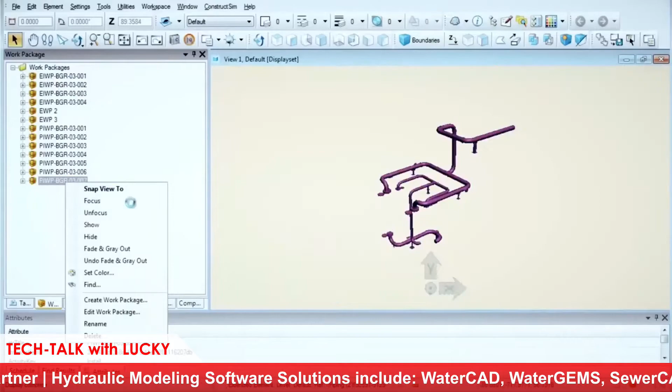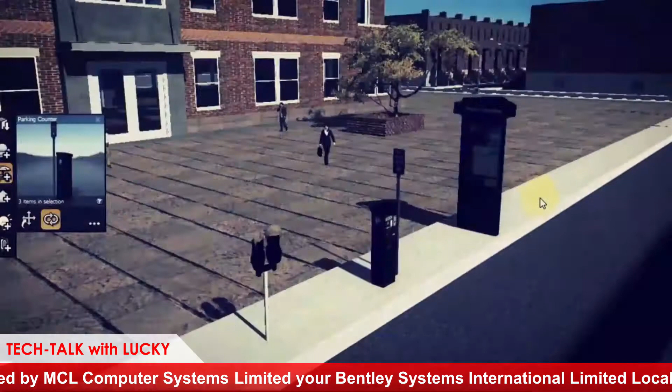Around the world, engineers and architects, constructors and owner-operators are using Bentley's software solutions to design, build and operate the infrastructure that sustains our economy and our environment. Together, we are advancing infrastructure. Bentley software has helped us deliver a successful Crossrail. Together with Bentley, Crossrail have created the Information Academy. It's about creating an environment for people to work together much more efficiently and effectively than they've ever done before. It is the front of house for our Emirates. So we wanted to do something spectacular, something iconic, something everybody will remember. We chose Bentley. There are not many competitors who could do a project on this scale. We wanted to use digital technology to do it in the best possible way. For this, we use Bentley software. We're very proud of the association with Bentley SACS. It's allowed us to be a leader in the industry. And more important is, the Bentley management has worked with us to help us feel that comfort to work with Bentley. And that is what is driving us. Bentley, advancing infrastructure.

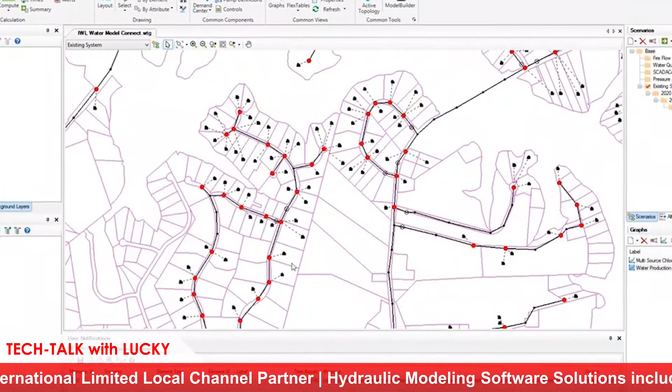There are things like the industrial Internet of Things, for example, where SCADA systems have been in place in water utilities for a long time. But now we're able to take that SCADA information, bring it into the connected data environment, use advanced analytics with that data, and use simulation models to not only understand the past and current performance of the system, but also forecast into the future how the system is going to perform, and again drive better decision-making for operations that can reduce costs, improve service levels, and reduce risk.

Bob, you wrote some of the code for the very first iteration of WaterCAD back in the 90s. What sort of changes have you seen in the industry and in the user experience since then? In 1995 I joined Haestad Methods, and later that year we started on WaterCAD 1.0. 22 years is almost an infinite amount of time in the software industry—things have changed so much it's really hard to identify just a few things to talk about.

We're incorporating cloud services into everything we do. For example, WaterGEMS and SewerGEMS CONNECT Edition seamlessly integrate with Bentley Cloud Services. And because now every CONNECT Edition application user is also a ProjectWise user, our WaterGEMS and SewerGEMS users can take advantage of cloud services like ProjectWise Share to share their reports and data with the project team, seamlessly through the cloud.

So what are some of the technological advances playing a role in Bentley's water and wastewater portfolio, enabling utilities to optimize efficiencies through intelligent infrastructure? Just think about it—in the last 5 to 10 years, the explosion of mobile devices, cloud computing, algorithms, machine learning, and all sorts of things that have happened recently. The technology we have now, better than ever before, enables this sort of digital transformation.

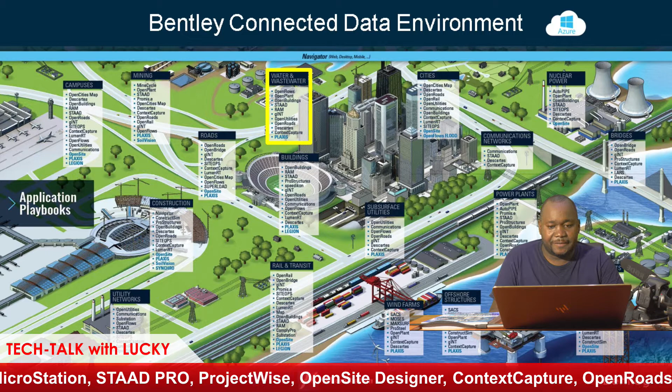Okay, now this is just a little bit about the various software tools that Bentley Systems International manufactures.

Now let's look at supporting the digital twin for the water industry. We have various software tools for the water industry. When you look at the water aspect, we have WaterGems, WaterCAD, WaterSight - the one we are looking at tonight - as well as Hammer.

Then on the other hand, we look at the sanitary aspect as well as the storm aspect. For sanitary and storm, we have SewerGems that cuts across the two. Then below that for sanitary, we have SewerCAD. Then for storm, we have CivilStorm and StormCAD.

Now the fourth component or aspect has to do with flood, where we have OpenFlows Flood.

Now, when you look at the life cycle solutions, particularly network focus, you have number one, analysis, where we look at OpenFlows WaterCAD or WaterGems, OpenFlows SewerCAD or SewerGems, as well as Hammer. Now these products will help a water utility support design of new systems, engineering analysis, and scenario simulation.

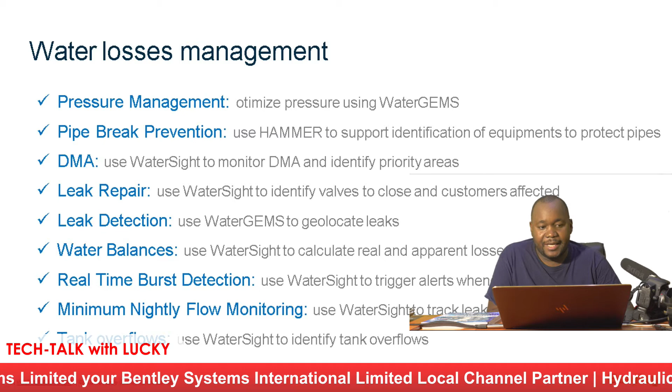You also have DMAs, where you can use WaterSight to monitor DMA and identify priority areas. Leak repair - you can use WaterSight to identify valves to close and customers that are affected. Leak detection - you can use WaterGems to geolocate leaks.

Now, water balances - you can use WaterSight to calculate real and apparent losses by zones. Now you have real-time burst detection - you can use WaterSight to trigger alerts whenever there is a burst. Minimum nightly flow monitoring - you can use WaterSight to track leakage in the system. And lastly, but not the least, tank overflows, where you use WaterSight to identify tank overflows.

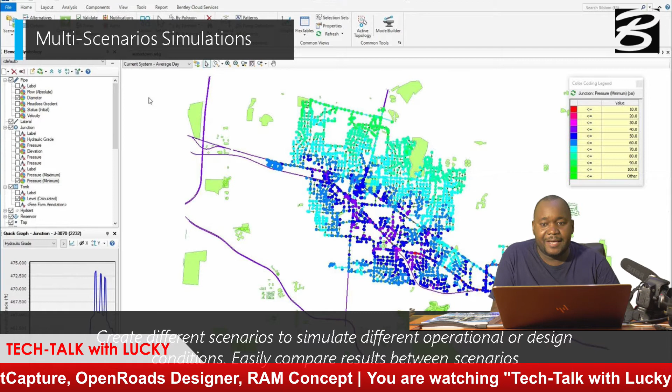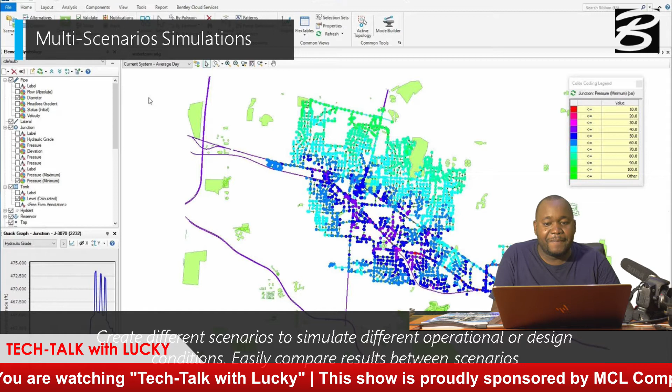So you have WaterGEMS. WaterGEMS allows you to have multi-scenario simulations. You can create different scenarios to simulate different operational or design conditions. You can easily compare results between these various or multiple scenarios and pick the most optimal solution out of what you have simulated.

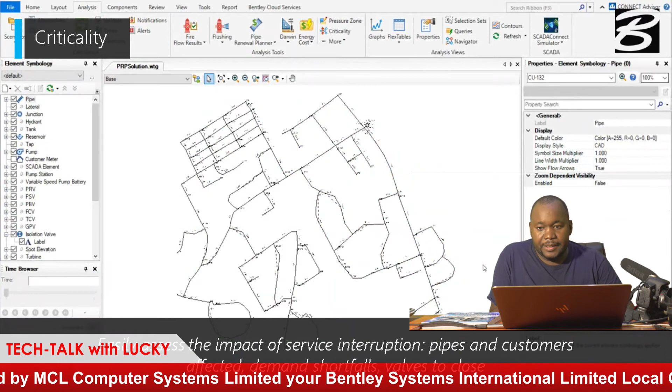Now you also have what we call criticality. You can easily assess the impact of service interruption, pipes and customers affected, demand shortfalls, and also what valves to close.

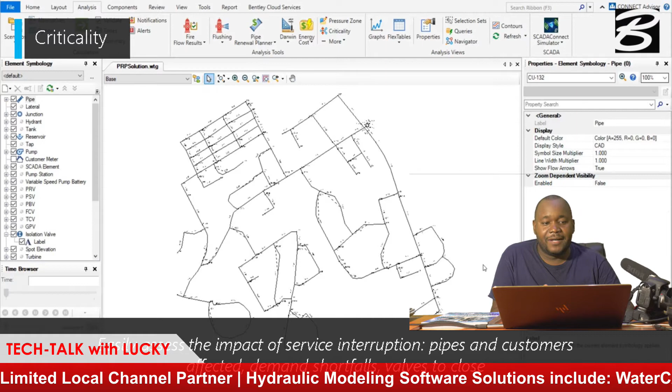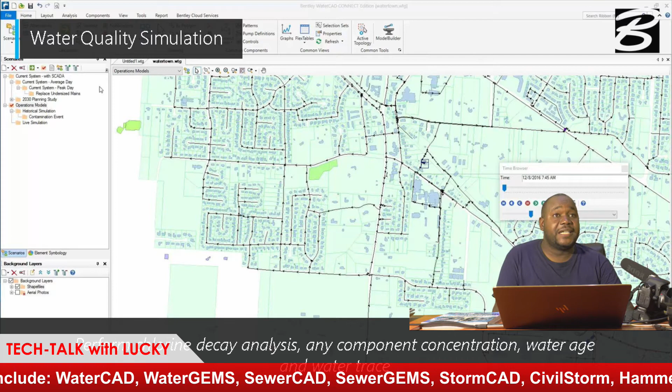Water quality simulation - you can use WaterGEMS to perform chlorine decay analysis, any component concentration, water age, and water tracing. Pipe renewal planner - you can use WaterGEMS to identify the priority pipes for rehabilitation. Leakage detection using Darwin Calibrator - you can locate potential leaks in the network.

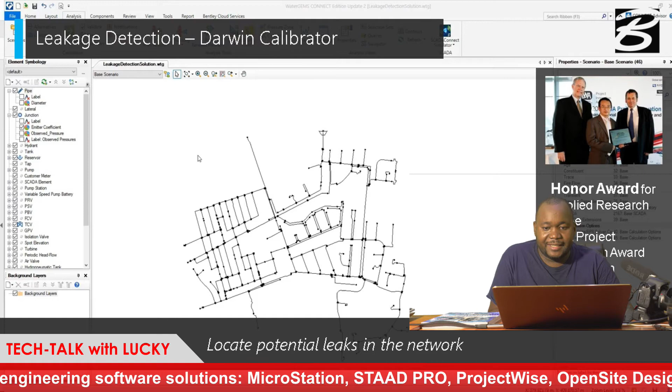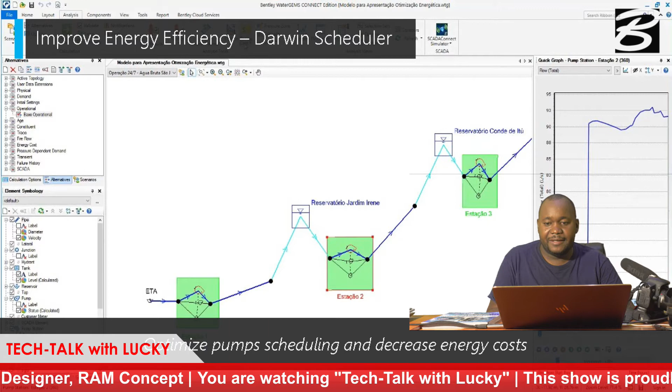You can improve energy efficiency. I had hinted earlier using Darwin Scheduler, where you optimize pump scheduling and decrease energy costs. For the commercial utilities interested in knowing how they can use WaterGEMS, and particularly the Darwin Scheduler, to improve energy efficiency, we are readily available. We are at your service. We can demonstrate to you how you can use WaterGEMS to optimize pump scheduling, as well as to decrease energy costs.

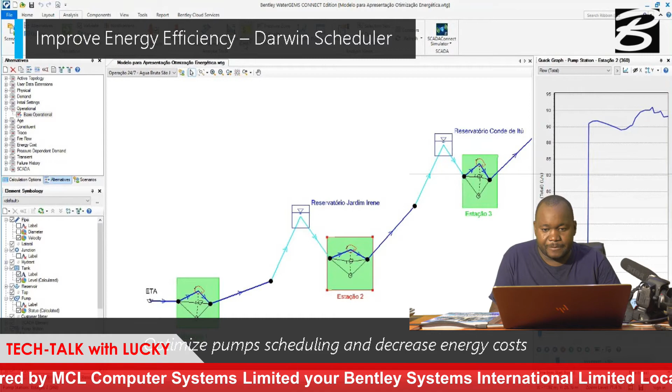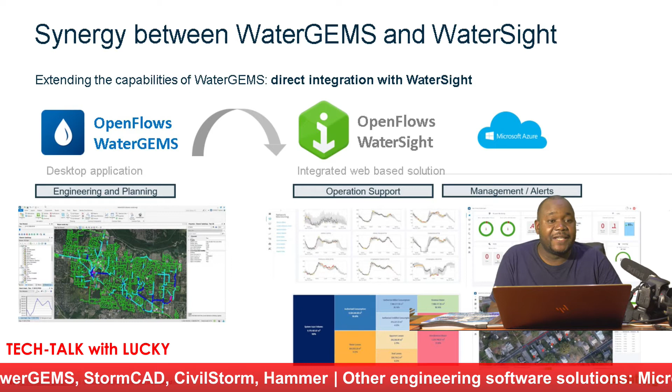Now we have introduced a synergy between WaterGems and WaterSight. What this has done is extend the capabilities of WaterGems through direct integration with WaterSight. So you have OpenFlows WaterGems as well as OpenFlows WaterSight. I forgot to mention earlier that OpenFlows WaterSight is cloud-based, whereas OpenFlows WaterGems is an application which you download and install on your PC. So basically with WaterGems you will have engineering and planning, whereas with WaterSight you have operation support, management and alerts.

Now, with WaterSight, what challenge do commercial utilities face? In most instances, you have data overload. Now, how do you make sense out of mountains of disparate data? It can be overwhelming. Accessing that data is also quite difficult.

So you also have a challenge of system complexity. In the real world, everything is connected - pipes, tanks, pumps, valves, controls, meters, SCADA, weather, major events, demands, maintenance - and engineers, operators, and others all need to make important decisions.

So basically, with WaterSight, you get interoperability across enterprise technologies. You have network monitoring, pump performance, tank performance, alerts, water audit, emergency response, and capital planning.

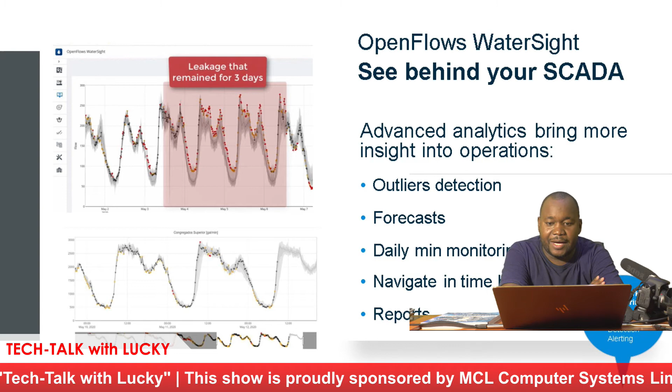Advanced analytics bring more insight into operations: outlier detection, forecasting, daily min monitoring, navigating in time history, and reports.

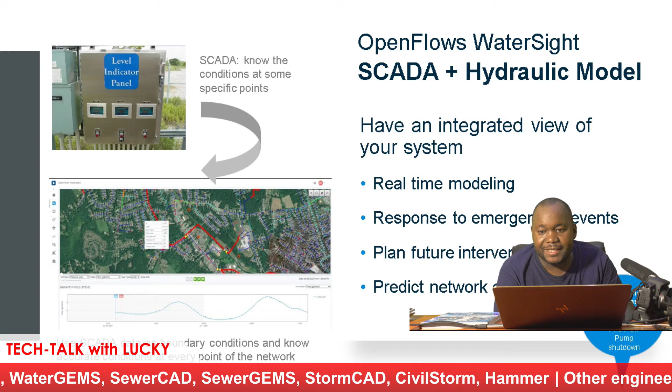With OpenFlows WaterSight, you have a SCADA plus hydraulic model integrated view of your system. You get real-time modeling, response to emergencies or events, planning for future interventions, and prediction of network conditions. You use your SCADA data as boundary conditions to know accurate conditions at every point of the network, whereas with SCADA alone you only know conditions at some specific points.

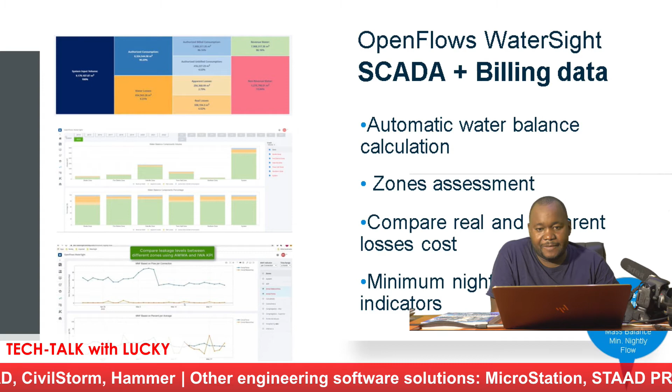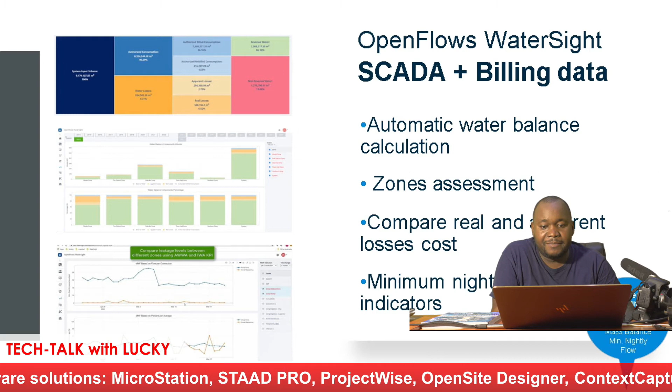OpenFlows WaterSight combines SCADA plus billing data for automatic water balance calculation, zone assessment, comparison of real and apparent losses cost, as well as minimum nightly flow indicators.

This is the end of our brief presentation, but before we call it good night, allow me once more to bring in another video clip, which is going to talk about the experience of a certain company called AECOM that has gone digital. I hope for those of us, whether in the water sector or consulting firms or just civil engineers, who are still doubting about the need to go digital, we will find inspiration in this video clip.

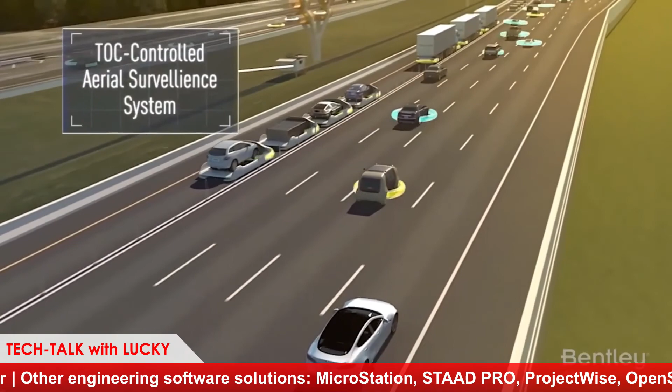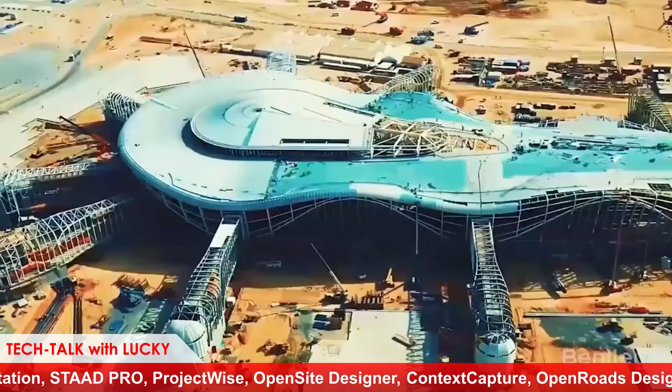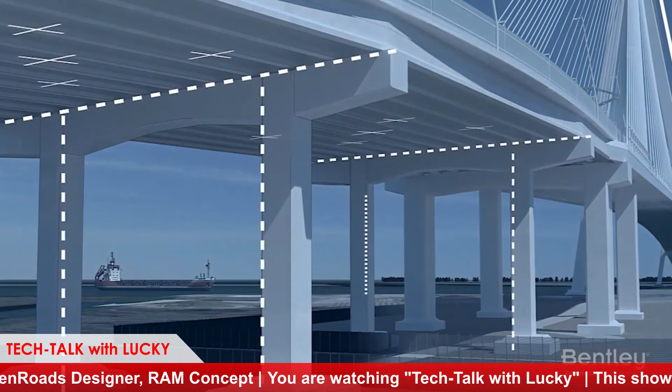Going digital for us is also about leveraging the tools that we use to their maximum capability. So our partnership with our software vendors, and Bentley in particular, is extremely important to us. We service many different markets, and it's essential that we have the ability to leverage the resources across that broad footprint. What I mean by that is work share, particularly on our large complex design-build projects. Our ability to move work around and engage a host of different design teams, regardless of where they sit—not just in the US, North America, the Americas, or globally—is essentially important. And that's only going to become more important going forward as we deliver these large complex design projects.

Welcome back. I hope we have gotten one or two points from AECOM on how they are benefiting from going digital. Earlier on, we highlighted what Bentley Systems International is all about. Just in case you missed that, it is possible you may not have been watching. Allow me once again to show you the key highlights of what Bentley Systems International is all about, so that the next time you hear me talking about Bentley Systems International, you won't be thinking that I'm talking about the Bentley motor vehicle.

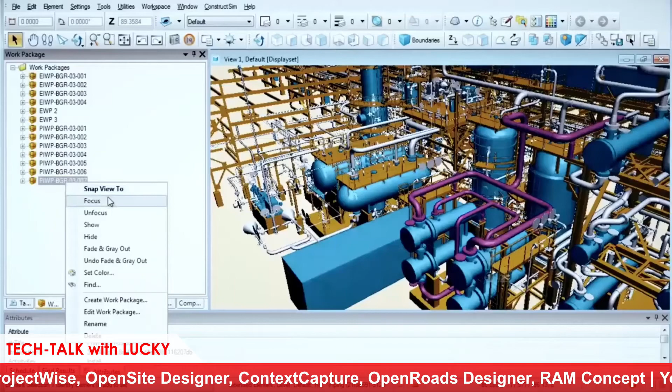Around the world, engineers and architects, constructors and owner-operators are using Bentley's software solutions to design, build and operate the infrastructure that sustains our economy and our environment. Together, we are advancing infrastructure. Bentley software has helped us deliver a successful Crossrail. Together with Bentley, Crossrail have created the Information Academy. It's about creating an environment for people to work together much more efficiently and effectively than they've ever done before. It is the front of house for our Emirates, so we wanted to do something spectacular, something iconic, something everybody will remember. We chose Bentley—there are not many competitors who could do a project on this scale. We wanted to use digital technology to do it in the best possible way, and for this we used Bentley software. We're very proud of the association with Bentley SACS. It's allowed us to be a leader in the industry. And more important is that the Bentley management has worked with us to help us feel that comfort to work with Bentley, and that is what is driving us.